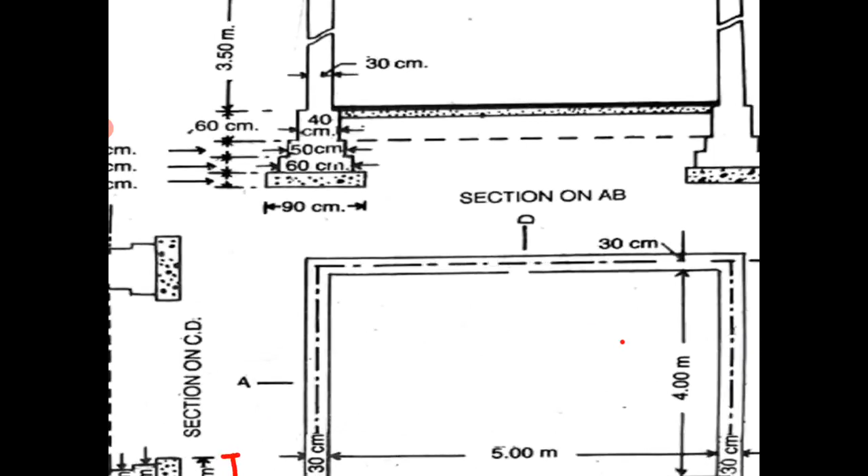Here the brickwork, this is the first footing. 50 centimeter is the second footing, 40 centimeter is the third, meaning 60, 50 that comes below the GL in this footing area. So it will come under the brickwork in foundation.

Then plinth means above your GL up to floor level. So this portion is your plinth.

So here you mark that the width of the first footing is 60, width of second footing 50, and in plinth this is 40. So we have to find out the brickwork taking this dimension but taking this width. We will apply the same principle as we applied in earthwork in excavation and cement concrete in foundation.

First we have to find out the center line length, and we already know that for the long wall it was 5.3 and for the short wall it was 4.3.

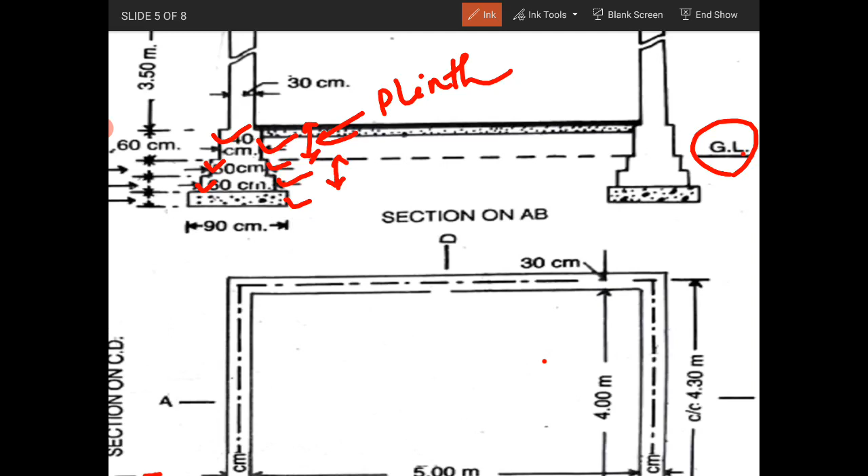So I draw this simple building, and I will mark the center line. From the center we have to excavate the footing.

First footing width means 60 centimeter. You mark first footing width, it is given as 60 centimeter.

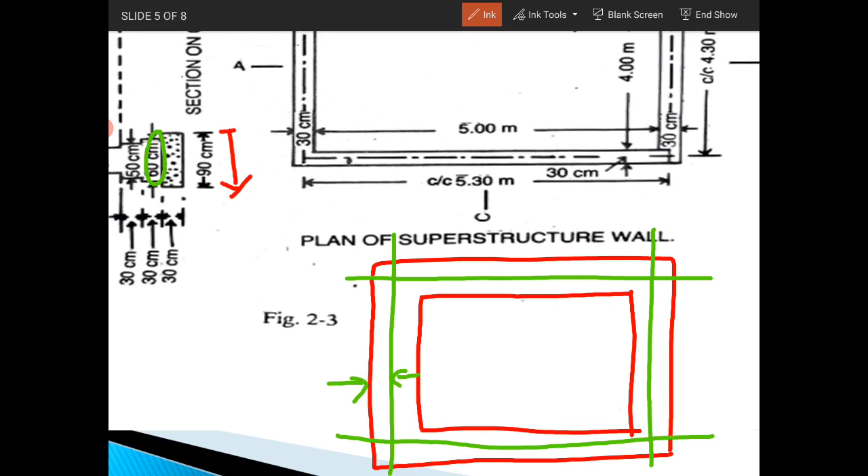Means from the center, this half will be 0.6 by 2, and this half also will be 0.6 by 2. Likewise for the long wall also, this is 0.6 by 2, and from the center this inner portion also is 0.6 by 2.

Same principle. So we know that the center to center length for the short wall is 4.3, and for the long wall it was 5.3. So what will be the out to out length and in to in length?

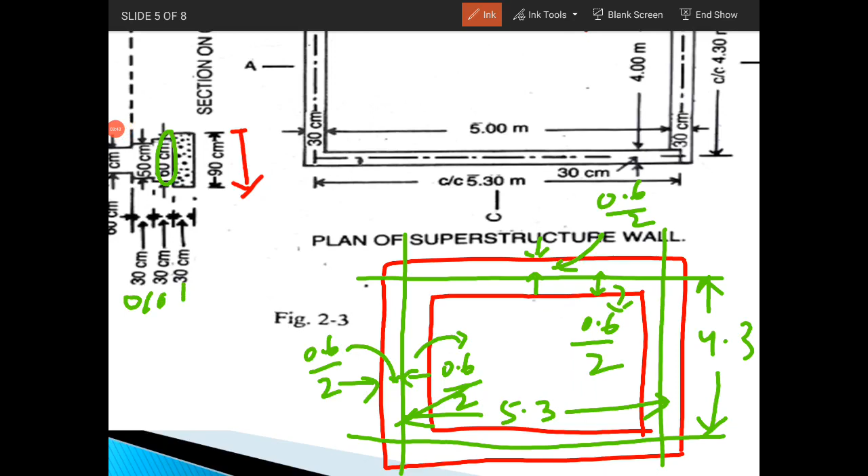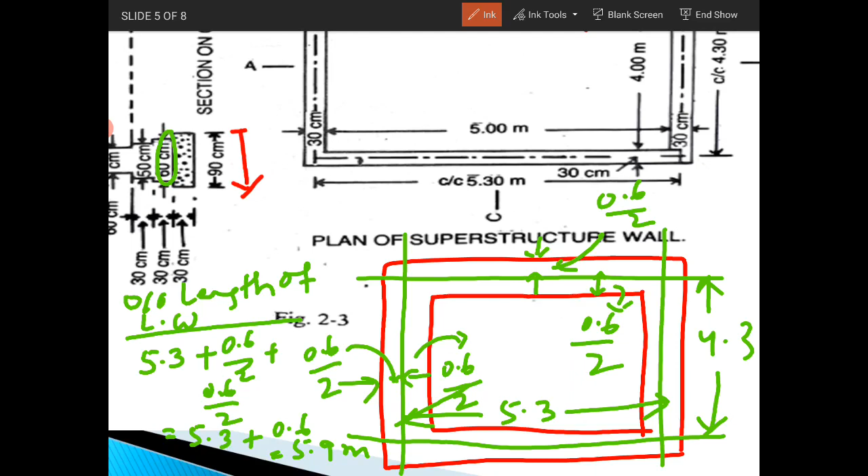My out to out length of the long wall equals center to center length, meaning 5.3 plus 0.6 by 2 plus 0.6 by 2. So 5.3 plus 0.6 which comes as 5.9 meter. So exactly for the short wall we have to find out the in to in length.

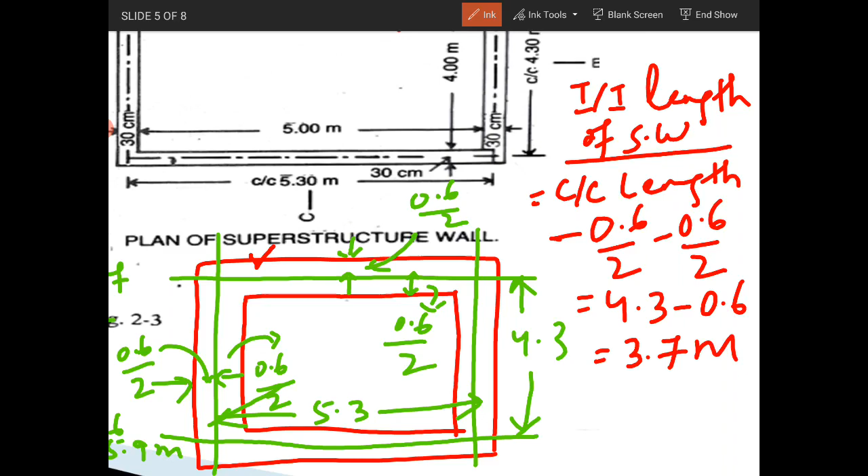So here you see we already found the first footing. Number is 2 because there are 2 long walls and 2 short walls, so number is 2. Length we found 5.9 and width is given as 0.6.

And what is the depth, I will show you. Here you see depth of individual footing. Depth of individual footing is how much? 30 centimeter. So first footing row is 0.3, second footing row is also 0.3, and third footing row is also 0.3.

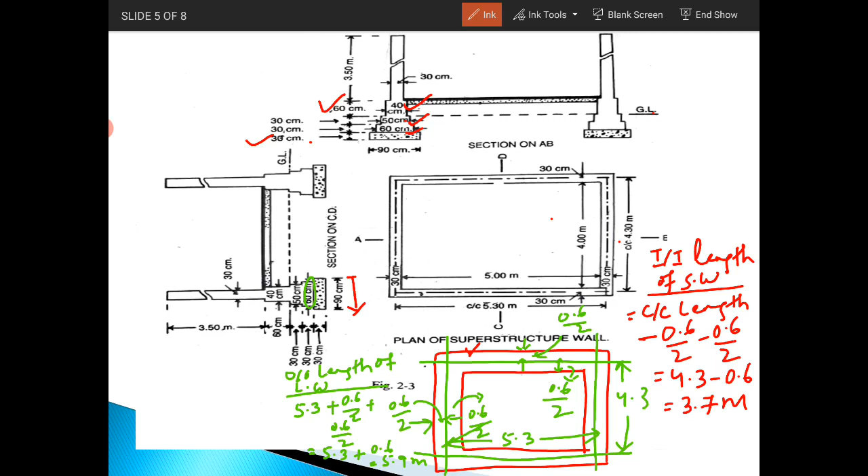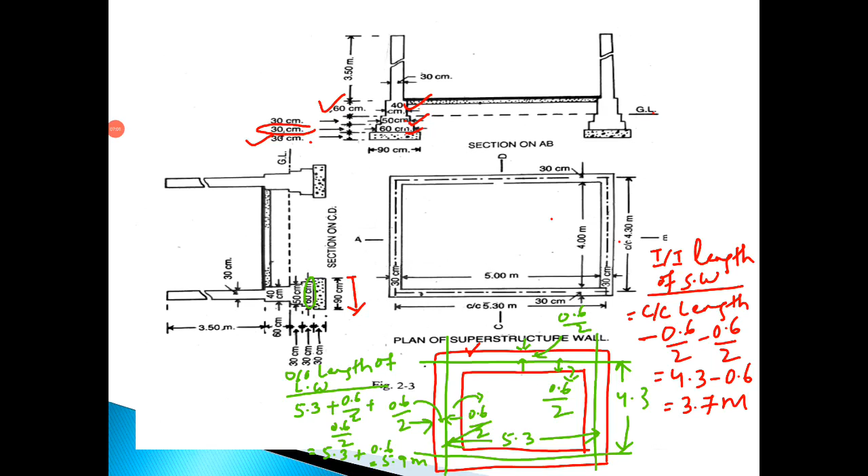So the first footing, sorry I have marked as first footing, is this middle portion. So here the depth is 0.3, so multiplying by 5.9, 0.6 and 0.3 we will get this quantity: 2.12.

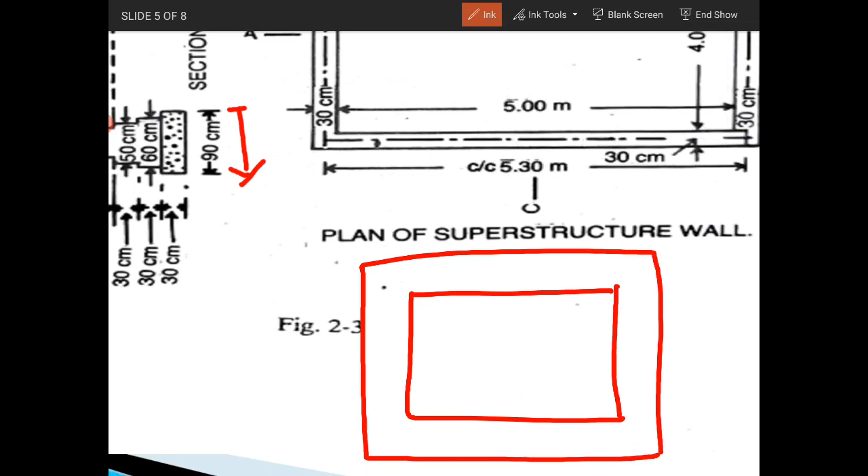So here center line, center line, center line and center line. Though we are doing estimate for the second footing, meaning for the width of 50 centimeter, we have to excavate 50 centimeter by 2 from the center to both the outer wall and from the inner side, one from the outer to the outer side as well as to the inner side.

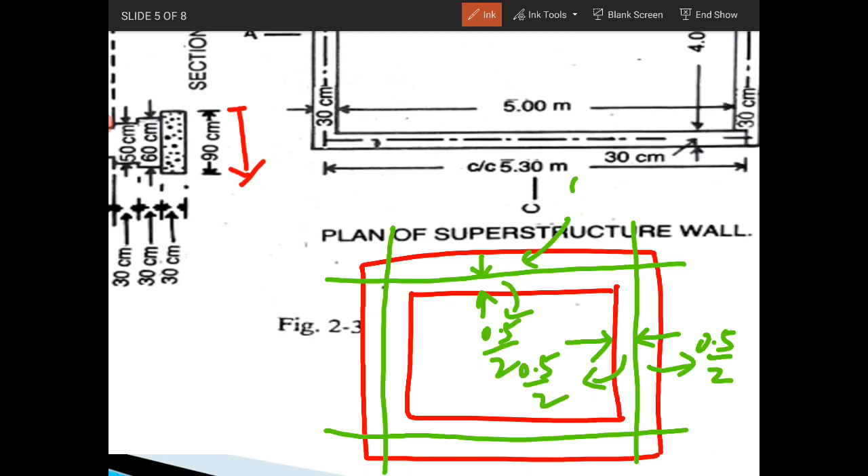Means from the center, if the green color is the center line, this will be 0.5/2 and this outer portion also will be 0.5/2. So from the center for the long wall this will be 0.5/2 and this will be also 0.5/2. So here also this exact same principle will be applied.

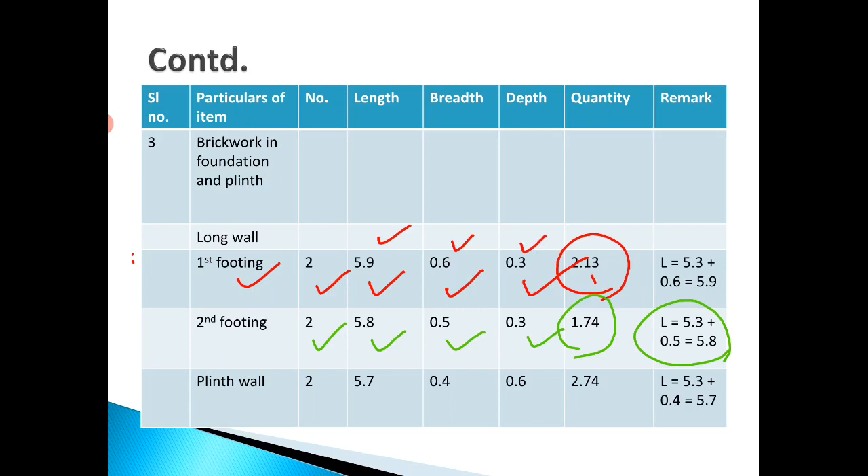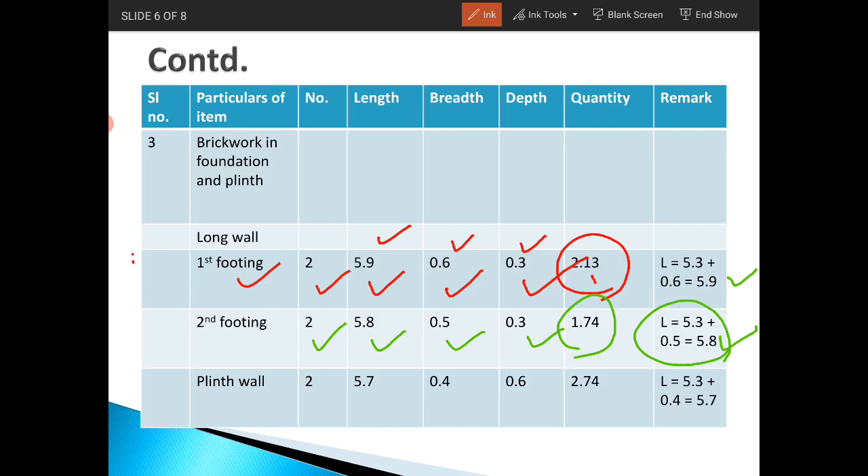So here you mark one thing: when doing long wall, just see the length was 5.9, and when we come to second footing the length reduces to 5.8... but in case of short wall it is 3.7, and again for the second footing the length increases. So long wall length is decreasing, and short wall length is increasing. So here we learned the long wall and short wall principle.

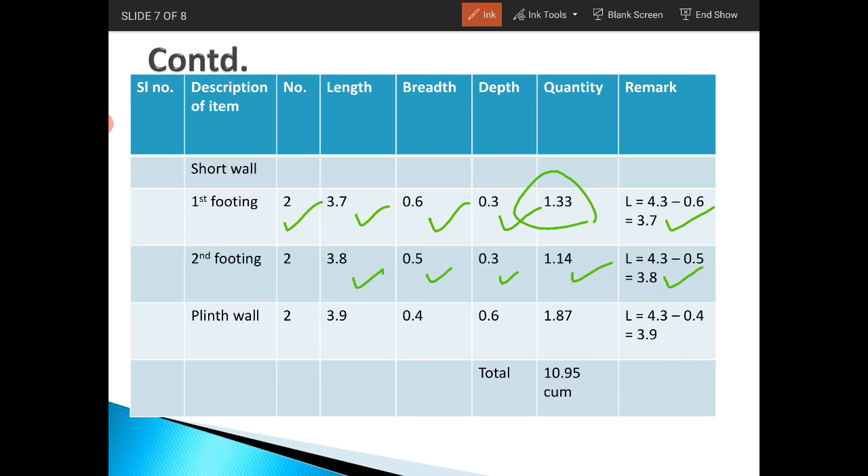So now let us see how we will calculate the long wall and short wall for the plinth wall. For calculation of the long wall and short wall for the plinth wall, we have to see the dimensions at the plinth level, that means what are the width and height of the plinth given in the drawing. Let us see.

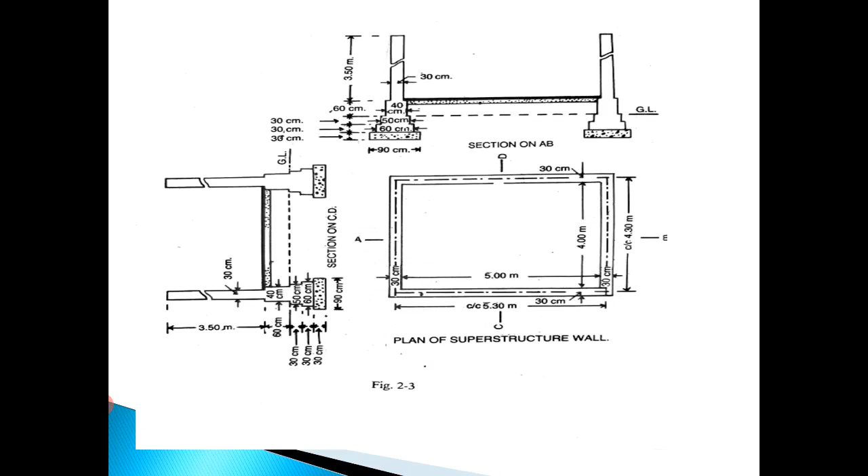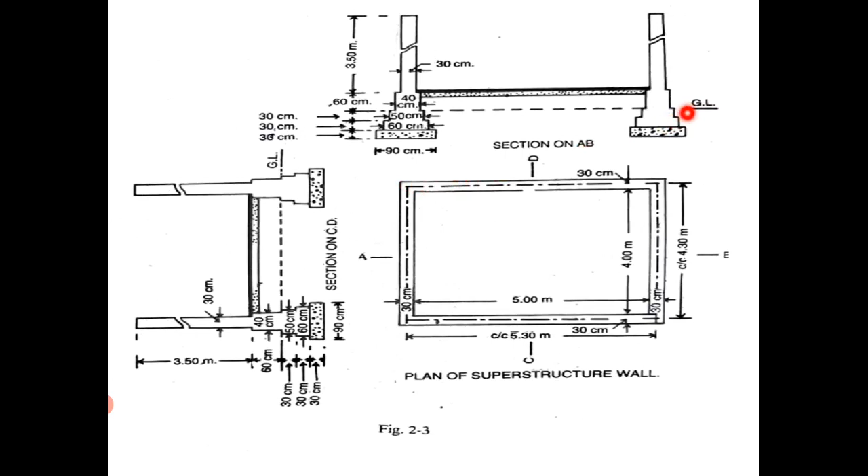Here it is the plinth, meaning the dimension of 40 centimeter its width, and the height is 60 centimeter. I have already shown you from ground level to the floor level, this height is called the plinth. So this is the plinth from ground level to the floor level. So let us draw the plan of the room at plinth level.

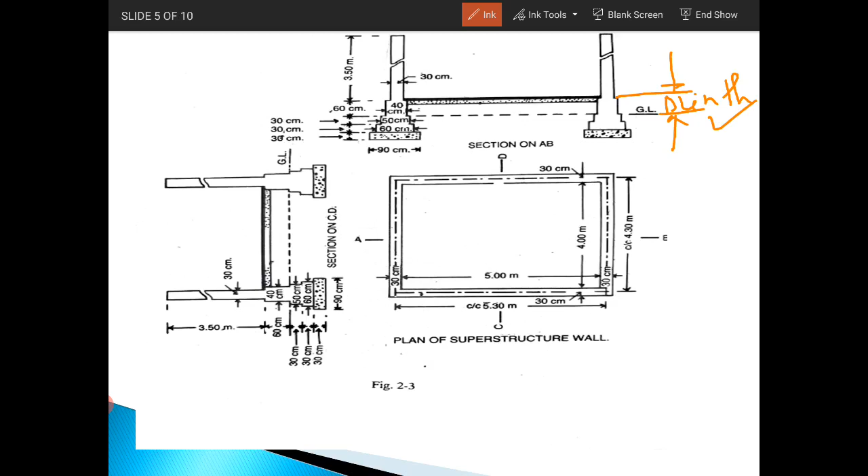We have to take the 40 centimeter width while drawing the plan. So let us draw. Here you see the plan of the building at plinth level. So that means the plinth breadth is given as 40, that means your wall dimension will be 40 centimeter, which is equal to 0.4 meter.

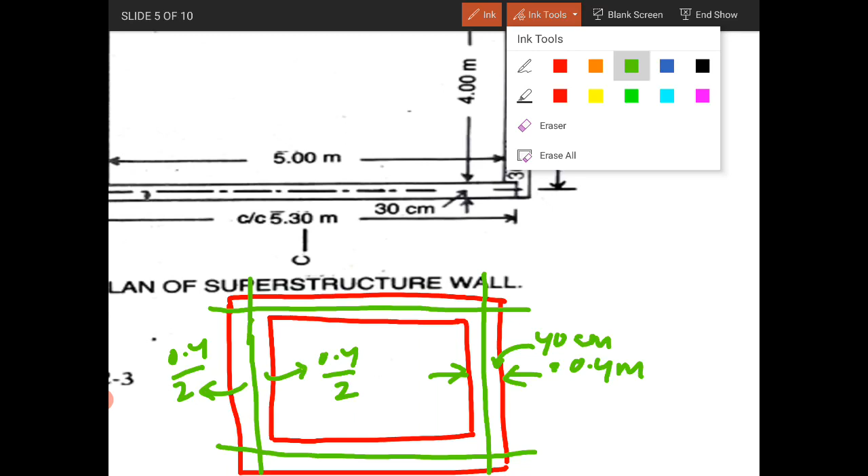So from the center to the inner wall it will be 0.4 by 2, and from the outside also it will be 0.4 by 2. Similarly on the other side, you mark this will be 0.4 by 2 and this will be 0.4 by 2. So what is the calculation for the out to out length of long wall and in to in length of short wall? Let us see.

So out to out length of long wall: we know that the center to center distance of long wall is 5.3. So our out to out length will be 5.3 plus half of the breadth on this side and half of the breadth on the other side, which is nothing but 0.4 by 2 plus 0.4 by 2, so which will be coming as 5.7 meter. That means center to center length of the wall plus one breadth.

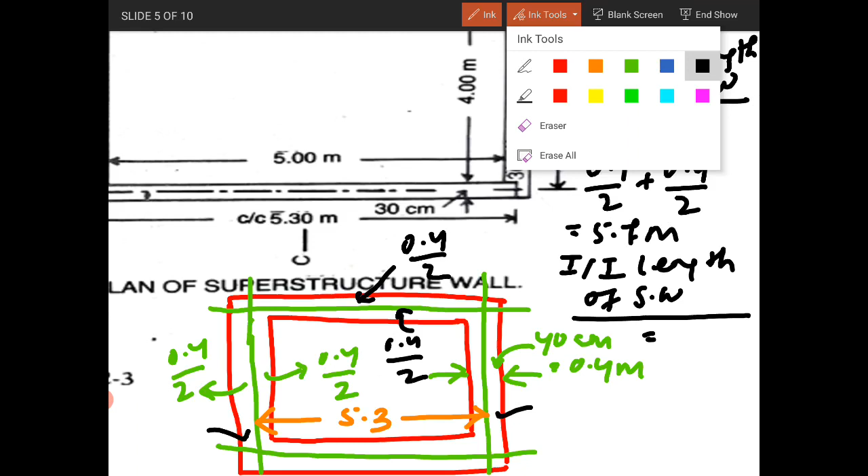Similarly, for calculating the in to in length of the short wall, what we have to do: the center to center length of short wall is 4.3. For finding out this in to in distance, from the 4.3 we have to deduct 0.4 by 2, and on the other side also deduct 0.4 by 2. So 4.3 minus 0.4 by 2 minus 0.4 by 2, which will come as 3.9 meter. Okay, let us move to our details of quantity and measurement page.

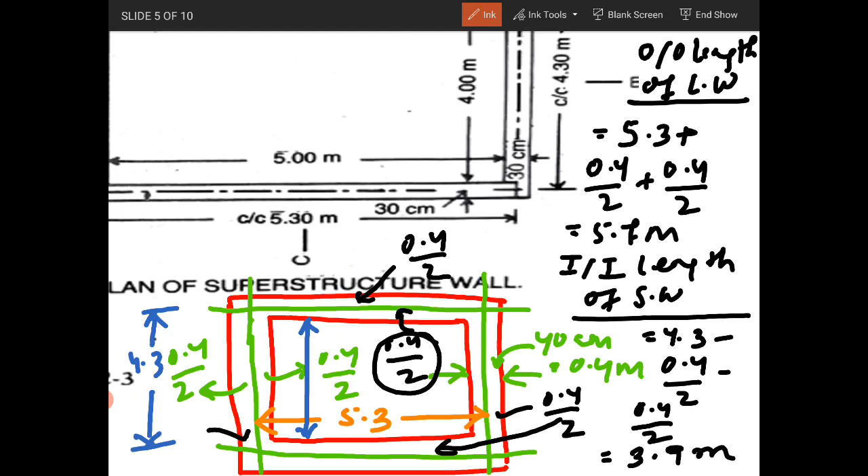So here you see the number of long walls is 2. Your length we found is 5.7, width is 0.4 and height is 0.6 as we saw in the figure. So total quantity will be the multiplication of the numbers, meaning 2 into 5.7 into 0.4 into 0.6. In every case we have to multiply the number of walls along with its dimensions, so it will come as 2.74.

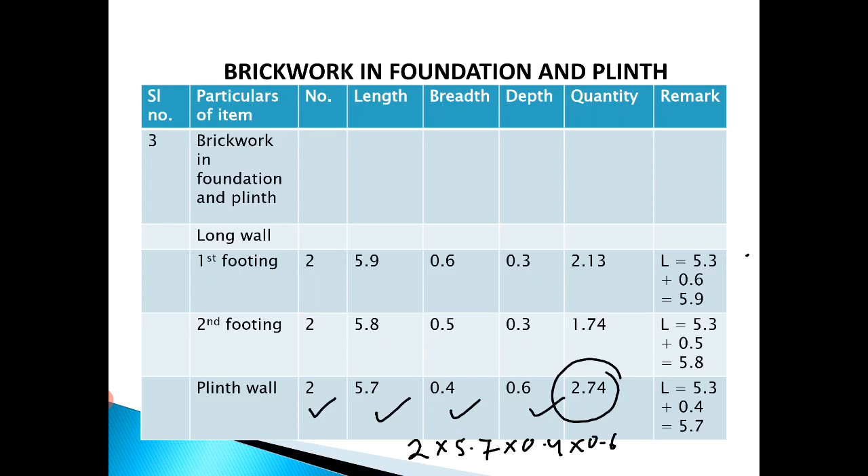So for the short wall, again the number is 2. Length of the short wall we found is 3.9, breadth 0.4 and height is 0.6, so quantity is 1.87. After adding all the quantities for long wall and short wall, we get the total quantity of 10.95 cubic meter. So this is all about brickwork in foundation and plinth.